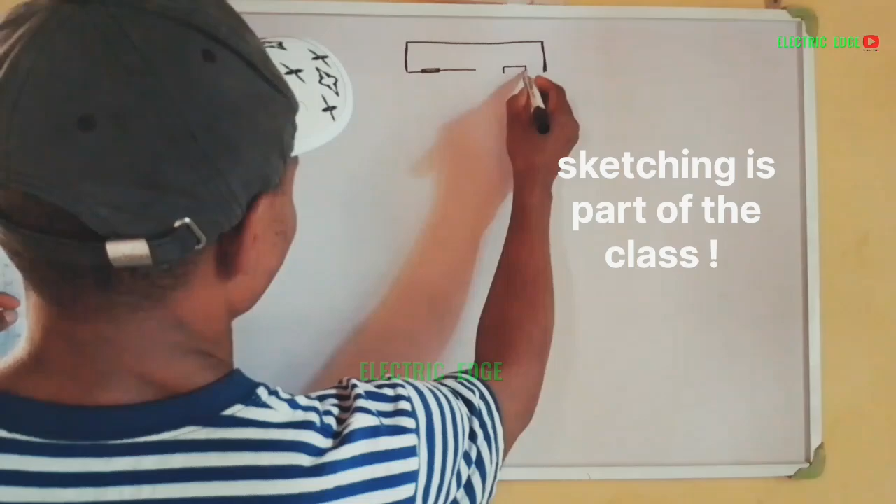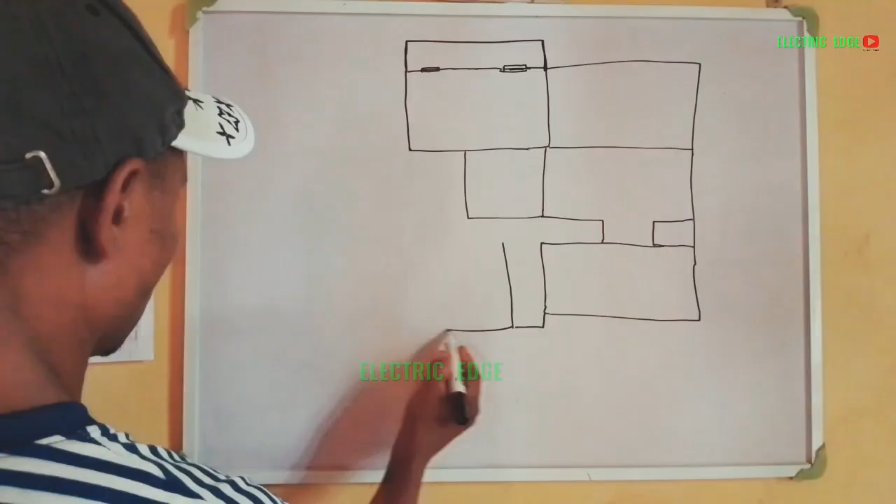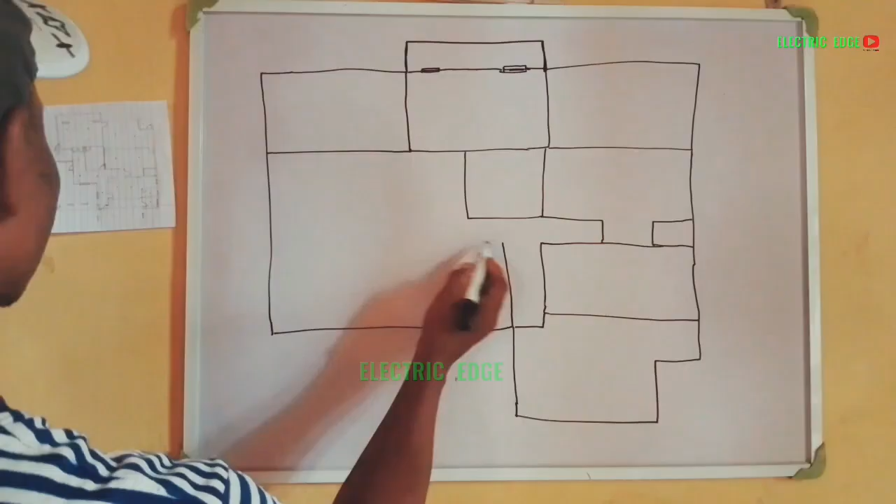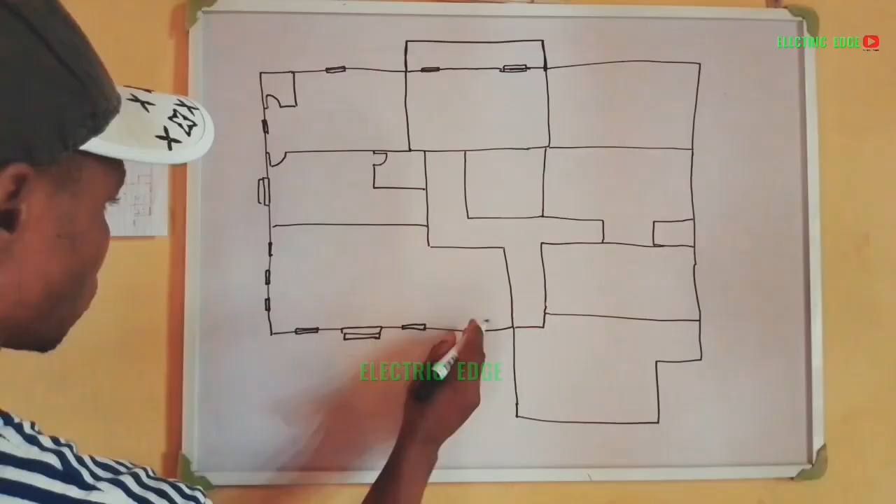This permits me to use this double line as my window. This is a window, this is another window here, this is a window here. Here we have a sitting room, we have a sitting room here. Entrance to this other one is somewhere here. We'll have another window here, we'll have a small window here, another one here, a window here, there's another window.

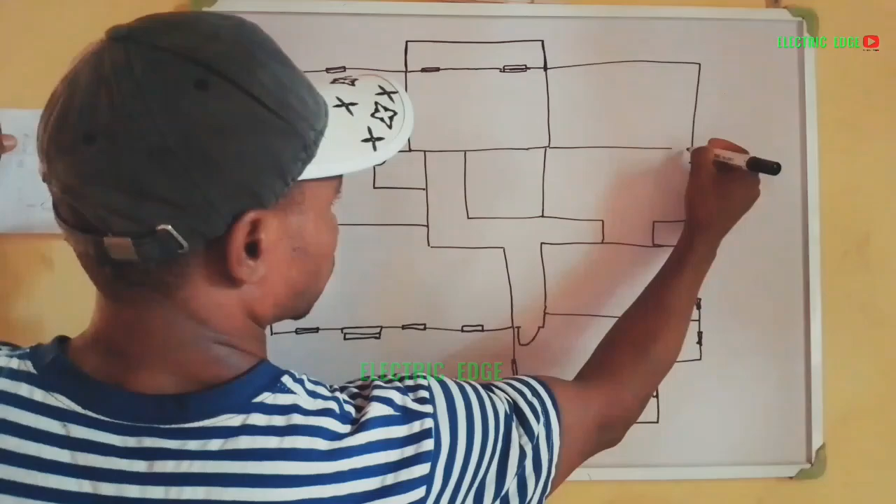Okay, this is a wardrobe. Window here. We have an entrance here. A window here. This is a store. This is a store here. This is a dining, this is where the dining is.

There's an opening here. Here is the sitting room. Here is the kitchen. This is a store. This is another entrance to the kitchen. Then we have another entrance here. This is room here, this is a sitting room. This is room. This entrance, this is entrance, this is entrance.

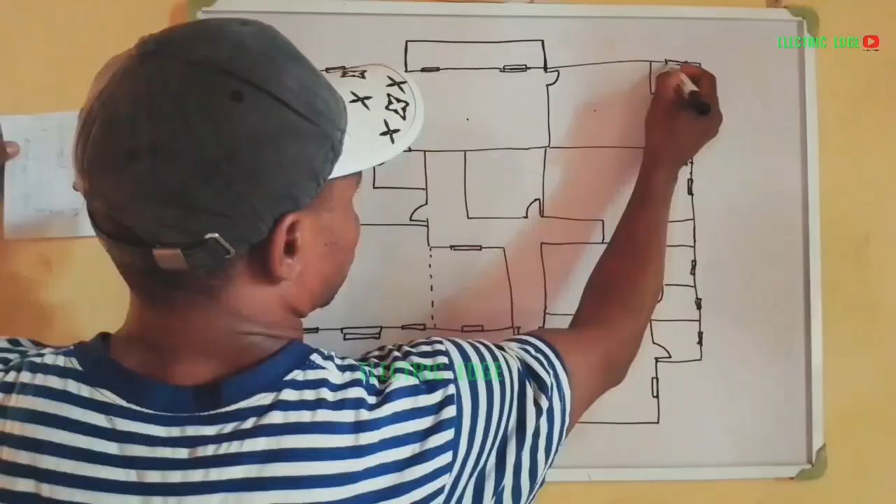Here we'll have a toilet here. This is window. What again? I hope I'm not omitting anything. There's another door here, it's a double door. There's a double door here. Here also is a double door. A double door. A double door.

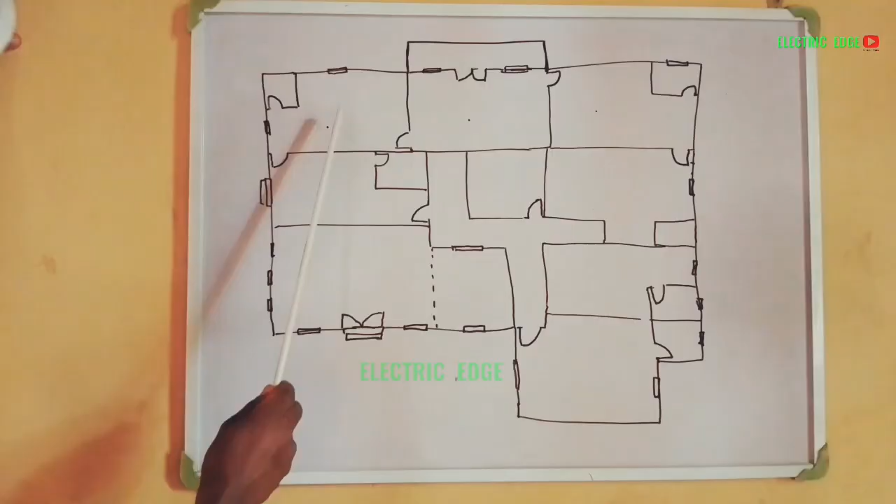So this is an example of what I have here. Now we're going to look at the building. This is a room, we have a room here. This is room 1, this is room 2, this is room 3, room 4, room 5.

This is a sitting room. Here is a sitting room. Here is a sitting room. Here is kitchen, here is kitchen. This is sitting room 1, sitting room 2. Sitting room 1, sitting room 2. Here is a store, here is a kind of store.

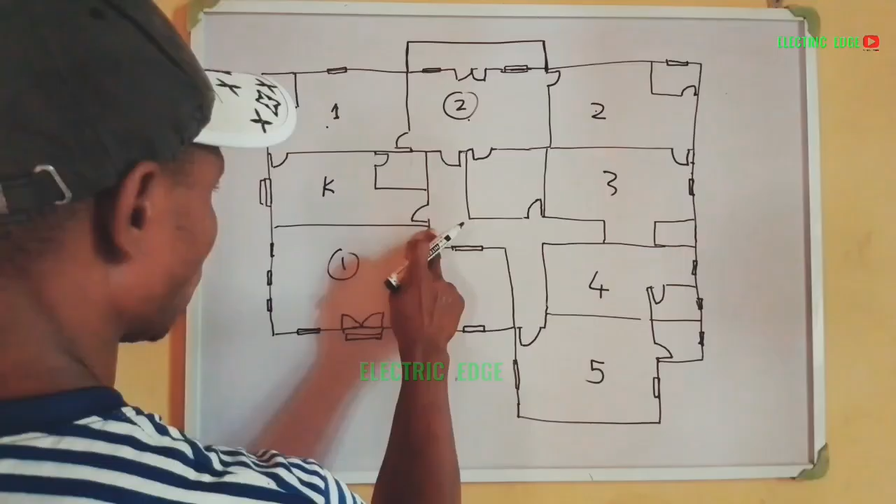Or this is where the solar control room will be. Then here we'll have a door here. Then here we'll have another door. Here.

So I want us to make use of this sketch, we're going to use this sketch in our demonstration. But now I'm going to clean all this. This is room 1, room 2, room 3, room 4, room 5. Here we'll have an entrance to this room. This is the entrance to this room. This is the entrance to that room over there.

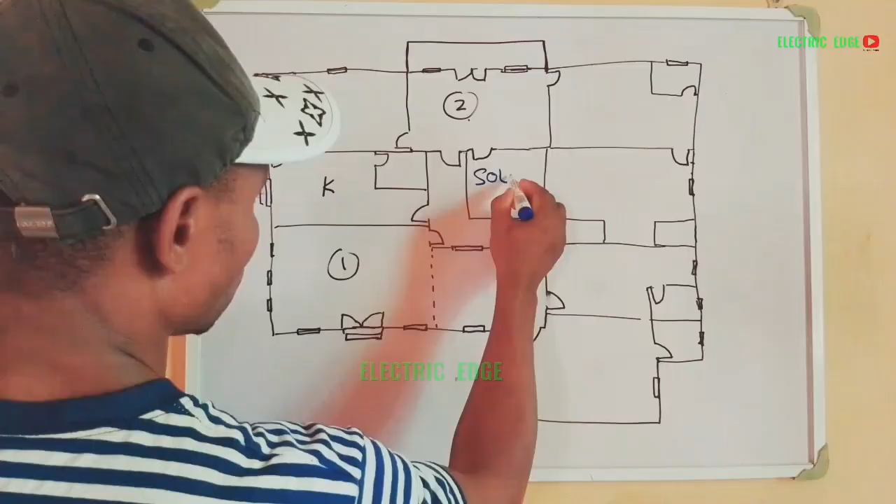Now, what again do we need? Now, we have the kitchen here, this is the kitchen store. This is where we'll keep our solar. This is sitting room, this is another sitting room. This is dining, this is the dining. So now we're going to look at the lighting points.

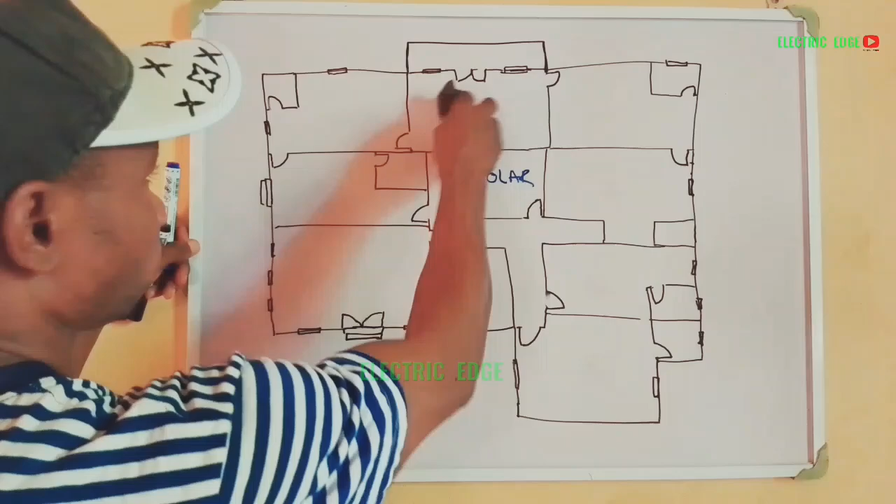Let's start without wasting time. Let's look at the lighting points. Somebody requested that I prepare this and use it to teach our beginners how to prepare their working drawing, their conduit layout.

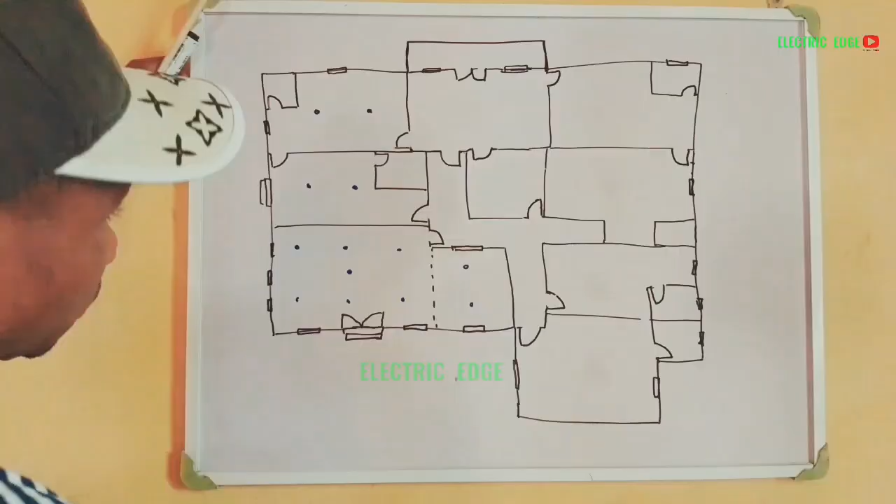Now, this is a room, we have two lighting points for instance. This is the kitchen, we have two lighting points. We have two lighting points. This is the dining, this is the dining, here we have two lighting points. Here we have, let's say, six lighting points: 1, 2, 3, 4, 5, 6. Then we have a middle one, which may be a chandelier, or let's say we have AC.

Here we have AC, and the symbol for this is a 15 amp socket outlet.

This one is for 15 amps, and this one is for 13 amps. So anywhere you see this symbol, you know that AC should be there, because I may not be using the actual symbols.

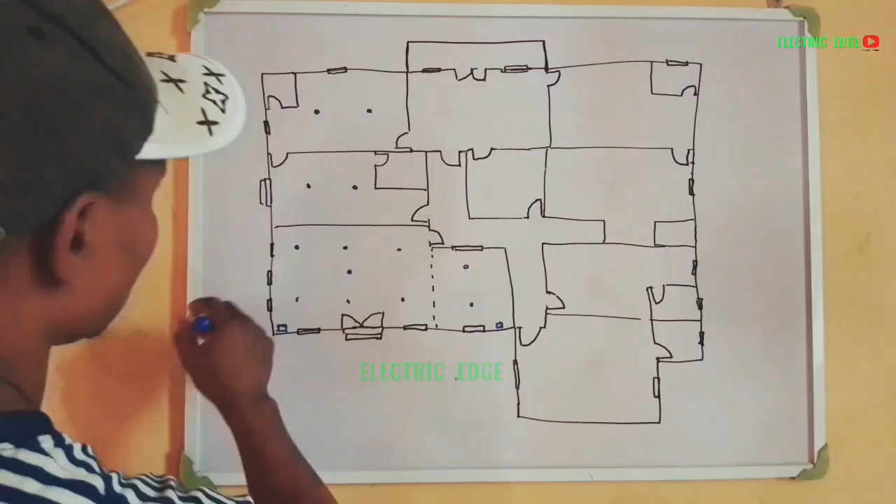Now here we have an AC socket here, we'll have one here, one somewhere here at the dining, then this is the kitchen. Let's say we have one AC somewhere here, and we have a window somewhere here. Let's say our window is here, then here we'll have one AC. Over here, this is room 1, we'll have one AC here, so we'll have one AC here. This is the living room, another living room, we'll have another AC somewhere here.

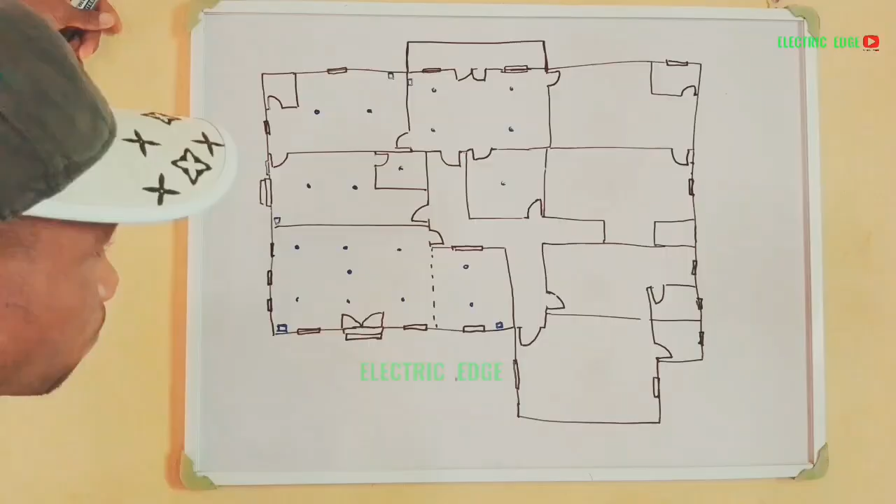Here we'll have 4 lighting points: 1, 2, 3, 4. Here we'll have 1 point of light, here we'll have 1 point of light. In this room we'll have 2 points of light. We'll have one here at the bathroom, toilet, one here. Here we'll have 2, 1, 2. Here we'll have one here, one here, one here. In this particular room we'll have 1, 2. In this room we'll have 1, 2.

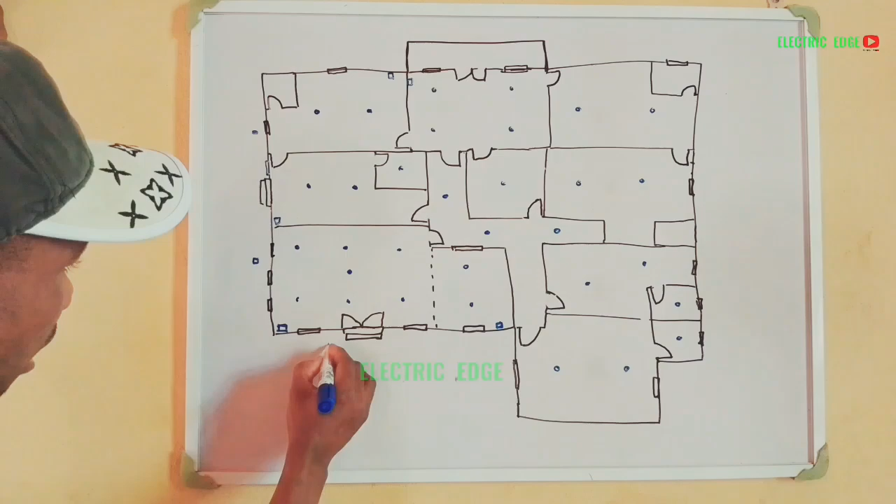Then we should also capture the outside lights, the outdoor lights or security lights. Over here, let's say we'll have 2 here, 1 here, 1 here, or 1 here. This other side, let's say we'll have 1 here, 1 here. Then here we'll have 1 here. This part, let's say we'll have 1 somewhere here. This part, let's say we'll have 1 here and another 1 here. Then this other side, let's say we'll have 1 security light here, 1 security light over there, and in this balcony we'll have 2 here, 1, 2.

Now, one of the methods is for us to count our lighting points, starting from the security lighting. But before we count, I want us to check and cross-check our bathrooms. This bathroom should have 1 point of light here, this other one should have a point of light here. This one is wardrobe, yes wardrobe. This one is wardrobe, and okay, let's count.

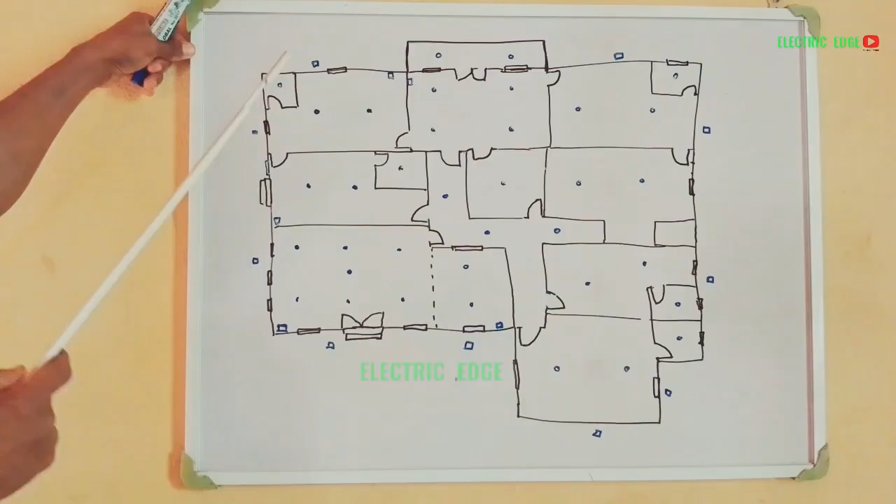Our security lighting points will have 1, 2, 3, 4 here for this side, plus 2 this side. That is 6, 7, 8, 9, 10, 11, and 12. This 12 can give us 1 circuit. 12.

Then let's count the points of light inside. I don't want us to confuse it with the ACs or the fans, because we should be having fans, but let's count the point of light for now. In taking note of the point of light, don't forget that we should have center boxes here, here, and here. For these ones that are 2, we should have center boxes as well, for instance here we'll have a center box already, this one we can have one center box, here we can have one center box. The center box may be used for a fan, that's why we're putting the center boxes, or for center lights. It can be used for spotlights, so that's why we're putting them.

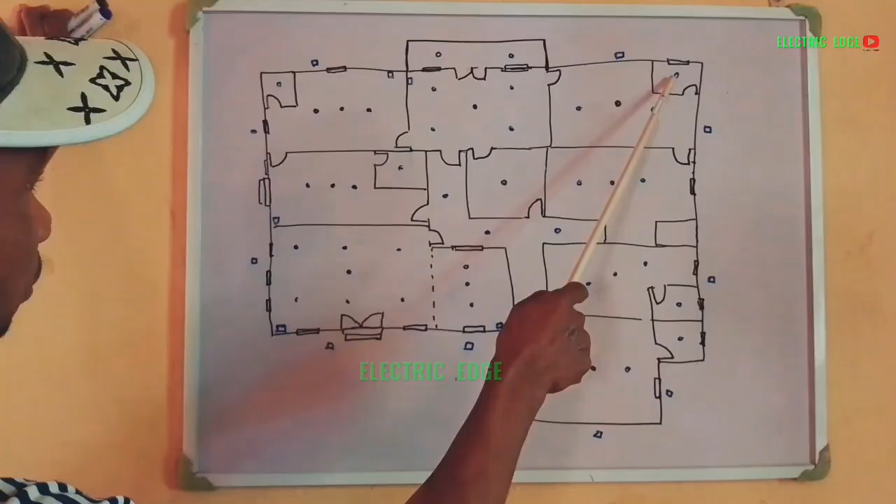Now let's count. We have 1, 2, 3, 4, 5, 6, 7, 8, 9, 10, 11, 12, 13, 14, 15, 16, 17, 18, 19, 20, 21, 22, 23, 24, 25, 26, 27, 28, 29, 30, 31, 32, 33, 34, 35, 36, 37, 38, 39, 40, 41, 42.

We have 42. We have 42 plus 12, that will be 54. The total points of light we have here is 54. Since we have gotten this one, this 12 goes for the outdoor light.

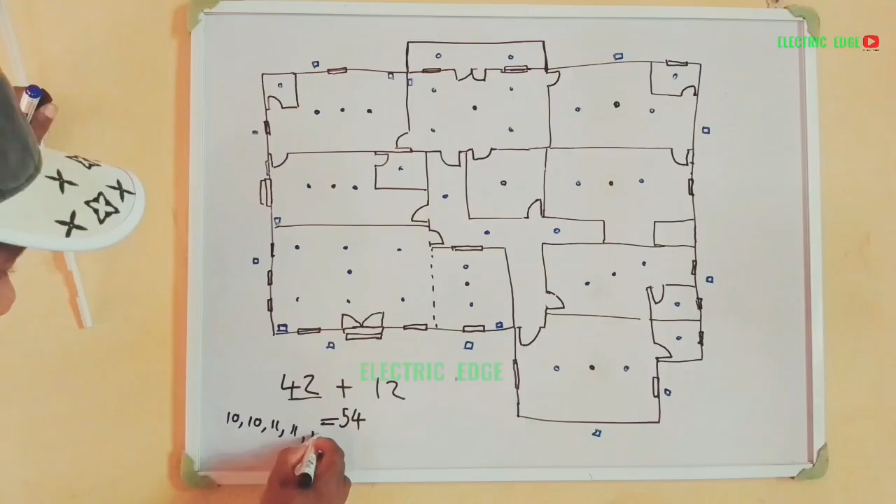We are going to start with the positioning of our switches. For now, we are going to look at the positioning of our switches, and before that, we are going to look at how our doors will be opened. Let's assume we want to enter this house at night, and getting to this point, the moment you open this door, you should open either this one or that one and have access to a switch. When you open this door, there should be a switch here or there, or there may be a switch here and there.

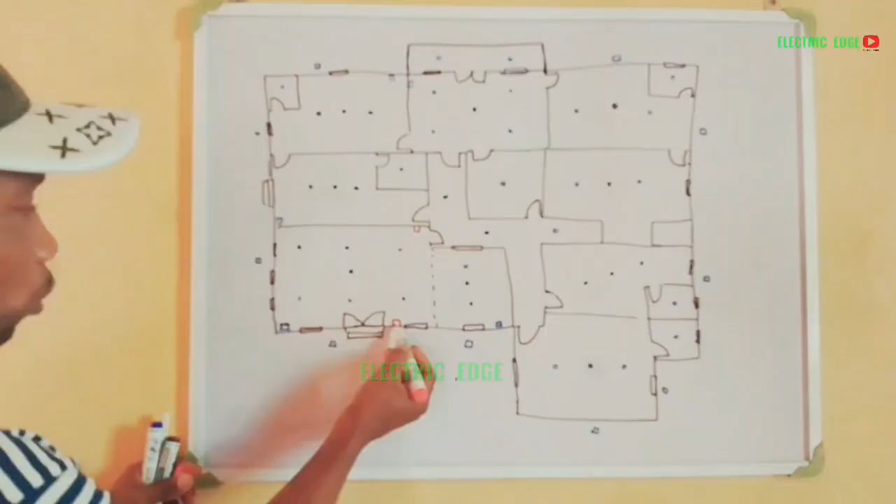So it depends on you. If you want to put a switch here, fine. Then maybe at the close of the day, when you want to go inside and rest, you close this entrance to the sitting room, switch off some of the lights here, switch either one or two over there, close this door, and go inside.

Then for the dining area, there should be a switch as well. The switch can either be here or there. Let's put a switch here, and let's put another switch here.

Let's go to the kitchen doors. When you enter from here, this is the entrance. Let's say there's a door here, maybe a double door or a single door. By the time you open it this way or that way, there should be a switch here or there. Let's put a switch here, and another one here. So if you open the kitchen door, you switch this off, and when you open the door to the kitchen, you turn this on from here.

By the time you want to go in, you should have access to another switch over here. From here you can turn this off. Let me position this very well. Let's say there's a light point here, and another one here, so this is another switch.

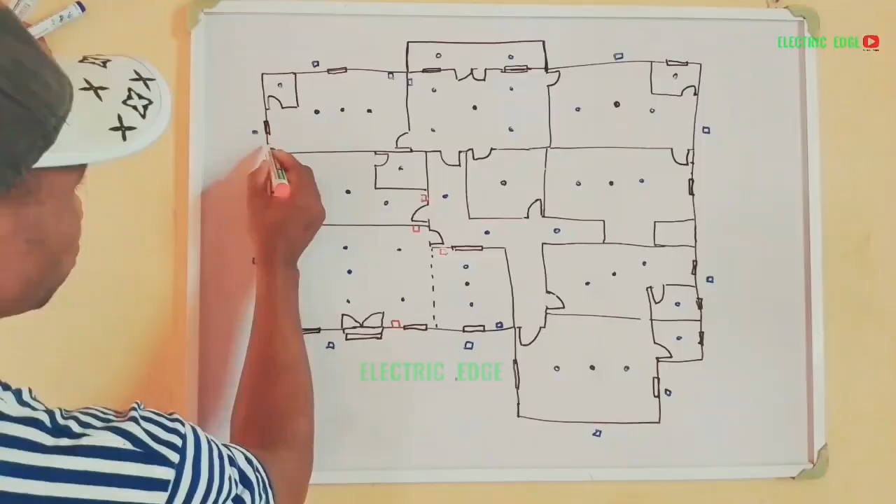Then let's go to this other room. From here you can enter this room, and there should be a switch here. There should be another switch at this point. The moment you enter from this sitting room, you should be able to turn the light on from this angle, then turn it off from this angle.

So let's go to this other one. Here we should have a switch. By the time you open this door and enter the sitting room, or you're coming from this room, there should be a switch somewhere here. Yes, there should be a switch here.

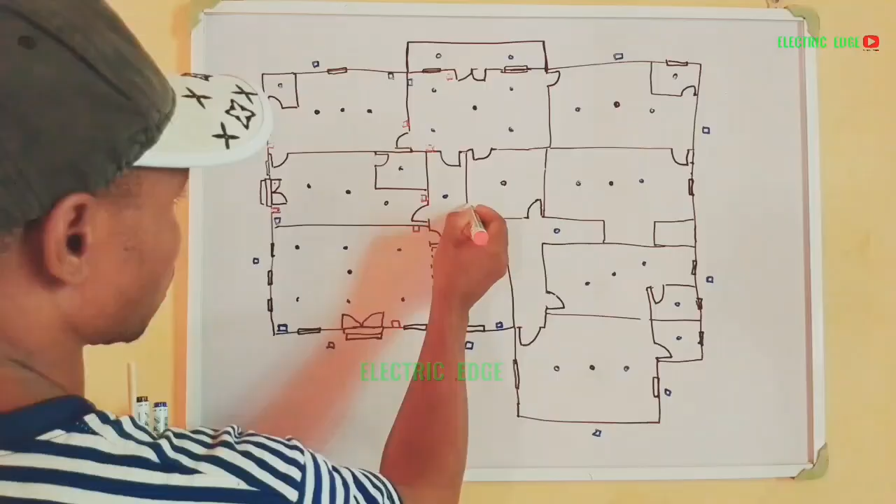Then over here there should be a switch as well, either here or there. Yes, there should be a switch somewhere there. Then over here we should have a switch to control this light, this walkway. And we are omitting a point of light, there should be a point of light here.

This may look complex, but I don't want you to see this as difficult, because you won't always be seeing a simple conduit layout. Sometimes you see something that is a little complex.

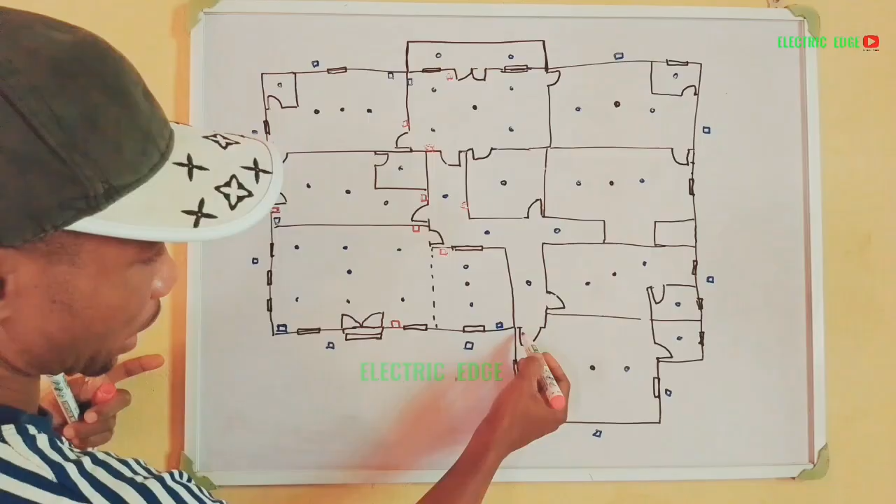Now in this one, you enter this house. When you enter, there should be a switch somewhere there to operate your light. From there we'll also see another switch for the bathroom. Then you go over here.

By the time you open this door, there should be a switch as well, for this particular bathroom. Then let's go on. Assume you come out from this room, there should be a switch here to turn this on, and another switch somewhere here to control this. Let's say we'll have another switch here.

Then you go into this particular room, you should have a switch also. There should be a switch here. You can also have it as a two-way switch, and there's another one here.

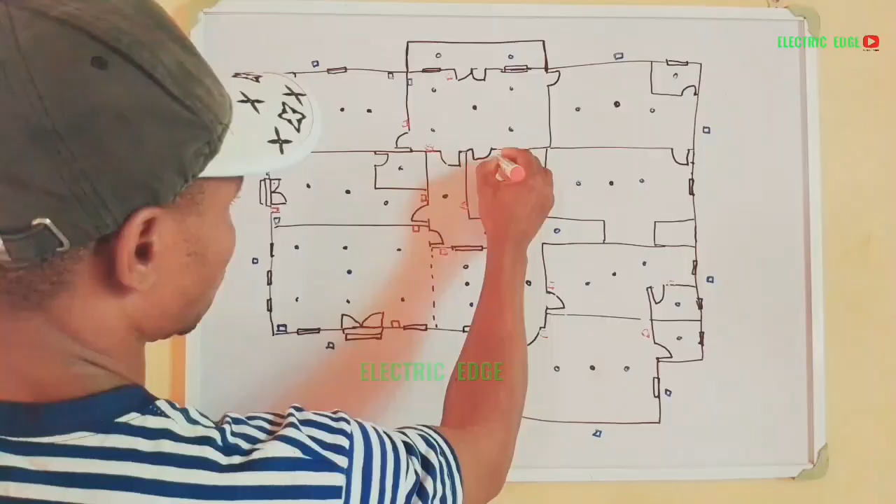Then what again? By the time you go into this, or you come out, just came out, we'll have one switch here, one here. You can have another one here, and another one here. Any of these can also serve for security.

Now we have a switch here for this bathroom. We should have another switch somewhere here, and have another one at the inner side of this room.

The next thing we need to do now is to start routing our conduit. Now if you look at what we have here, we have captured all the points of light.

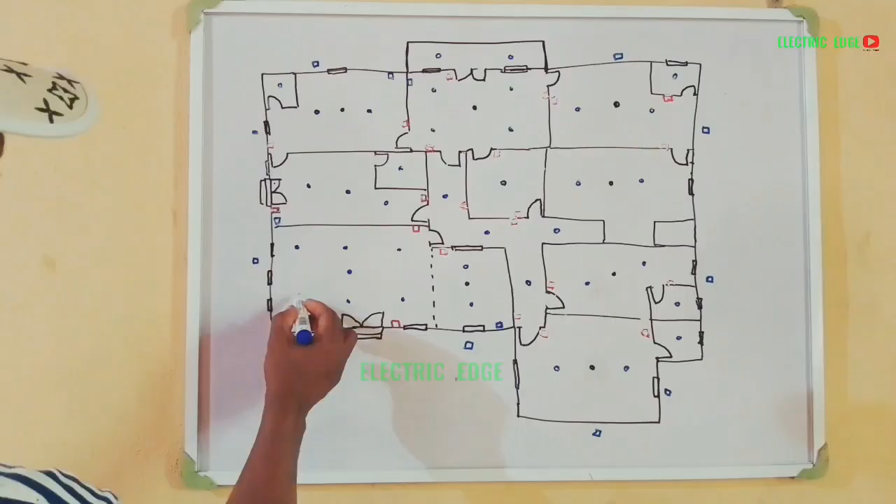After preparing your sketch and capturing all the rooms and spaces in that particular building, the next thing you should do is put in your points of light. After that, choose particular positions for your switches, and that we have captured. Then after capturing the position where you need to place your switches, the next thing is to start routing. In routing the conduit, how do we start?

Now, how we need to start is individually in each of the rooms. Every room should have its own control. You can't control this sitting room from the kitchen, and you can't control the kitchen from here. No, they should have their independent controls. They can share one circuit, but the control should be within that particular space.

Take note of that. Now we want to look at this for the dining and sitting room. Here in the dining room, we're going to interconnect this to this, to this, to this, this, and this. Now, here we want to control this point of light from here.

And remember that we have a fan here, either fan, chandelier, or spotlight. Now we can make use of this particular switch. This switch needs to come to the center. This particular switch needs to come to the center.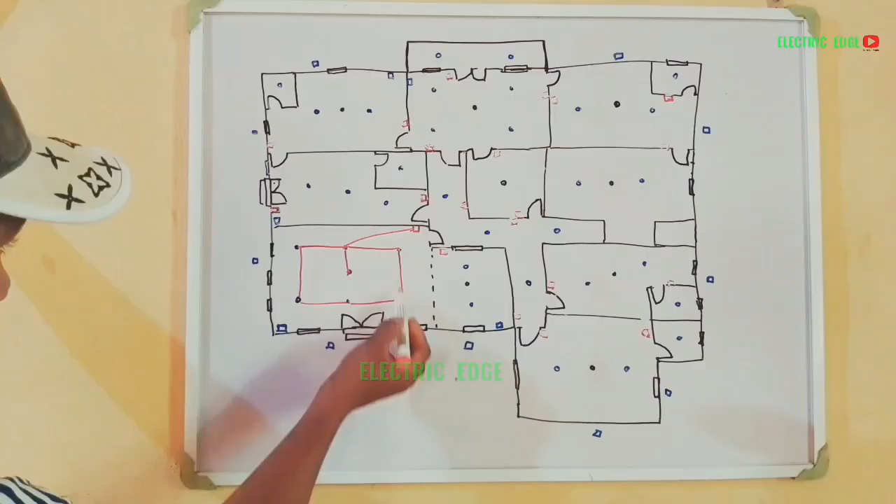Why we are doing it like this is because we may decide that this switch will turn on lights 1, 2, 3 as one gang, or this switch turns on 1, 2 as one gang, then this 1, 2 as one gang. Likewise, this may turn on 1, 2 as one gang, or this 2 as one gang, or this 2 as one gang. Because of that, we're going to cross this to this and then connect it to this other switch. Just take a look.

Before I move on, this is not the only type of conduit routing you can achieve. You might decide to put this particular hand here. This hand can come here, yes, it can come here. It can also come direct to this point. After connecting them together, you might decide that this hand will come here direct.

It is still okay, yes, it is still okay. Or you decide that this hand will come here direct. But let's leave it here for the purpose of this demonstration.

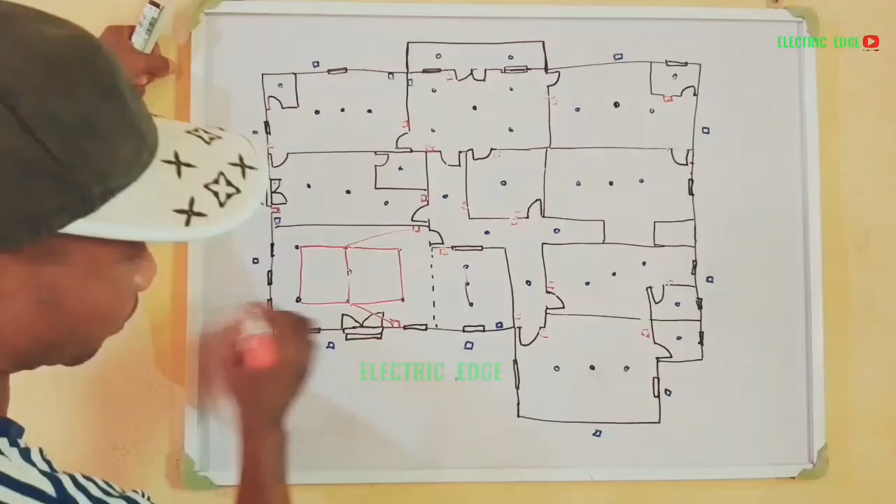Now, in this particular one, we are going to connect this switch here. Our switch will connect this and this. We can bring it to the middle, we can bring this switch to the middle. Then for this switch, I want us to go to the next one. We are through with the sitting room and the dining room.

Now let's go to the next one, this is the kitchen. We can connect this to this and this to this. We can also connect this switch to this and this particular switch to that. For this one, we can connect this to this to this, and connect our switch either to the middle.

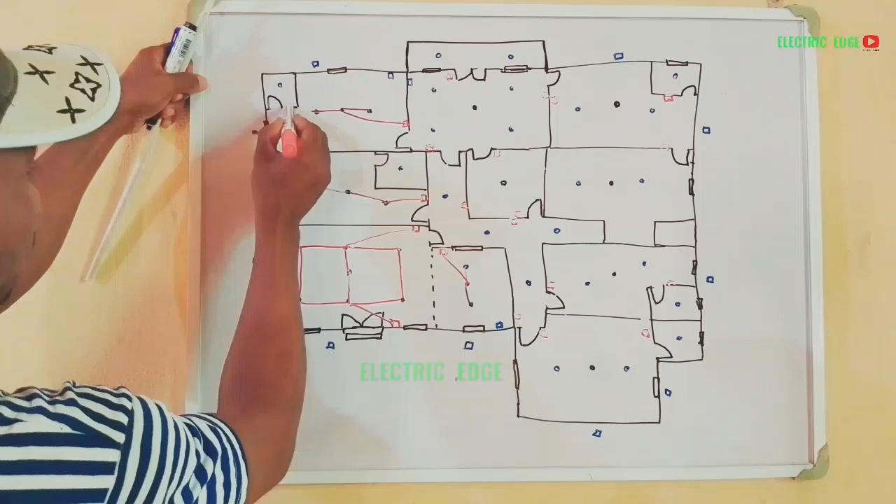Yes, and from here we can also link, this is the switch. We did not put the switch, but the switch should be outside. Now from here, we can connect to this point of light, and from this point of light we can connect to any one of them here. This switch is taking care of this too, in the bathroom.

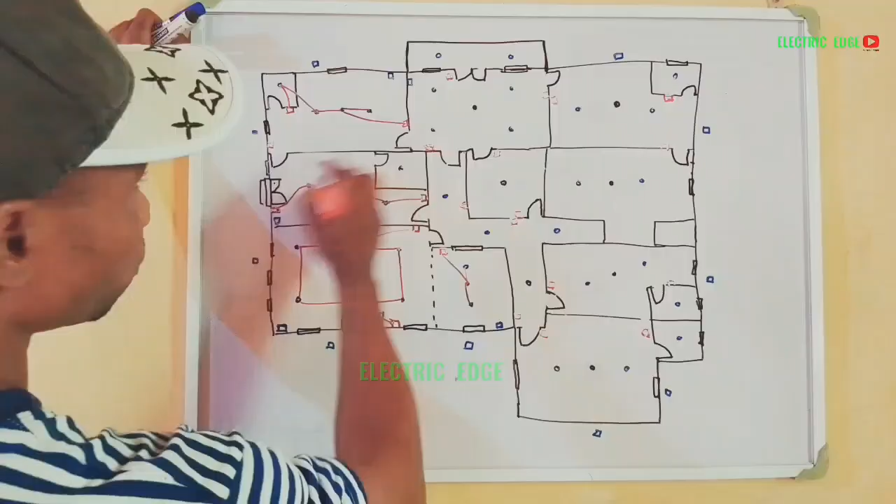So let's look at the next one, this other inner sitting room. Here we're going to connect this to this, this to this, this to this, and this to this. The four of them are connected to each other.

We can also connect this particular one to the center. This is another switch over here. This one can also link to any of this, link to this and link to this. So this is another switch that will take care of some of this light.

So we're going to connect this to this, we're going to connect this. We need to link the four of them, yes, we need to link the four of them. If you like, you can connect this to this, and any one of them can link to the center.

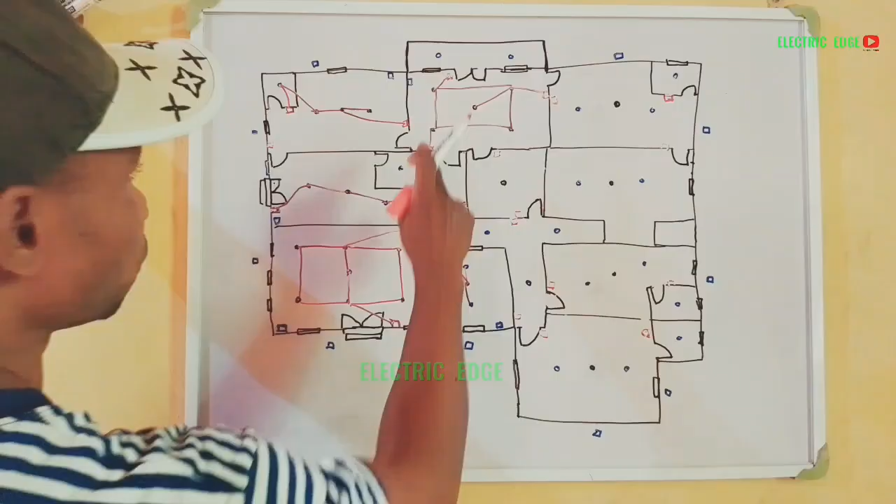This one can link to the center, another one can also link to the center if you like. Or if you don't, you can connect one of these straight to the center. Yes, you can connect any of them to the center depending on how you want it. And if you want to join this to this as it comes to the center, it is also acceptable.

So come to the center, still two. But what I'm looking at, if you want to connect this to the security, to the outer lights. Here, we can connect this particular one to these three, either from here or from there, whichever one. You can connect this switch to this, and from here, we'll connect to this and come out again.

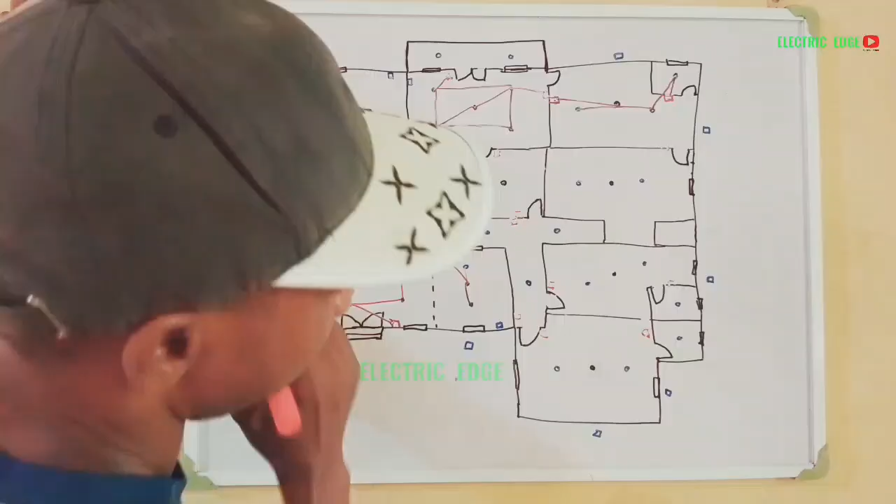Since we have two switches here, this one and another one, you can connect this to this, and then this to this. Our mains can travel from here to there, from here to there, or whichever way. So here we have 2 points, 1 point of light, two switches.

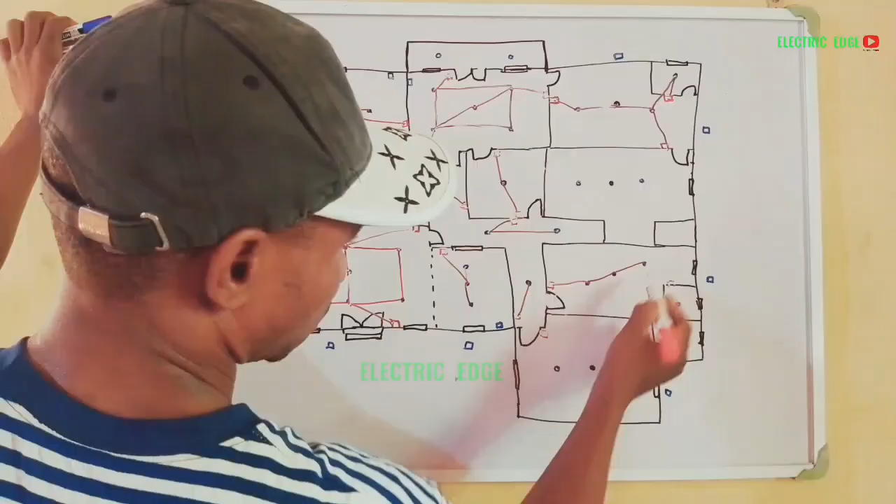This one can connect if this one can come here. This one can connect, this one can link to here, this one can link to this. Here, this one can link to this point of light. This will link to this and this. This will link to this at the bathroom and still come out to connect to any of this one. Then here, this one can link to this and this, and also link to this one at the bathroom.

What again? Here we'll have this particular one, no switch. Sorry, we'll have an entrance here. Got our entrance here. We'll have one entrance, then an exit over there. So for this, we can put a switch here. This switch will connect to this, connect to this, connect to this.

I think we've connected our lighting points. Then it will remain in the security. Then after connecting this, or before we start connecting this point of light, you can choose the position for your distribution board. And the positioning of your distribution board should be an accessible point where there is ventilation. Here we put our distribution board here.

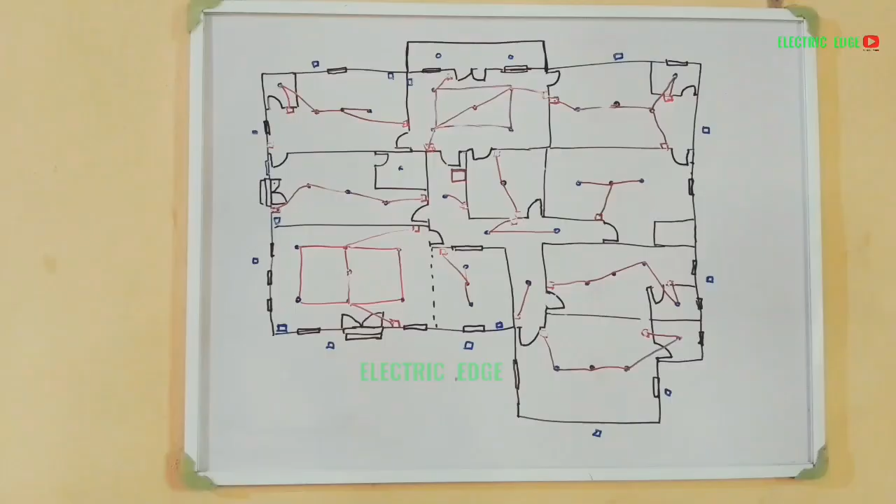But one distribution board may not be able to carry all the loads in this building, because by the time you check the point of light, check the ACs, check everything that we may have in this building, you discover that one distribution board may not be enough. So in this type of installation, there's every possibility that we'll be making use of two distribution boards.

Now, if you are preparing this, at this point, you need to choose a particular location where your distribution boards will be installed. But that does not mean that you've chosen a distribution board. We've not chosen any distribution board at all, because it's the number of circuits that we'll be having in this particular building that will show us the number of distribution boards we'll be needing.

Now, we've gotten the circuit. We decided that we're going to make use of 5 lighting circuits. Now, by the time we check the AC, let's assume we have one cooker unit. For instance, at the kitchen here, we'll have one cooker unit, we'll have one AC here, we'll have one AC in each of the rooms. That will be 5 ACs.

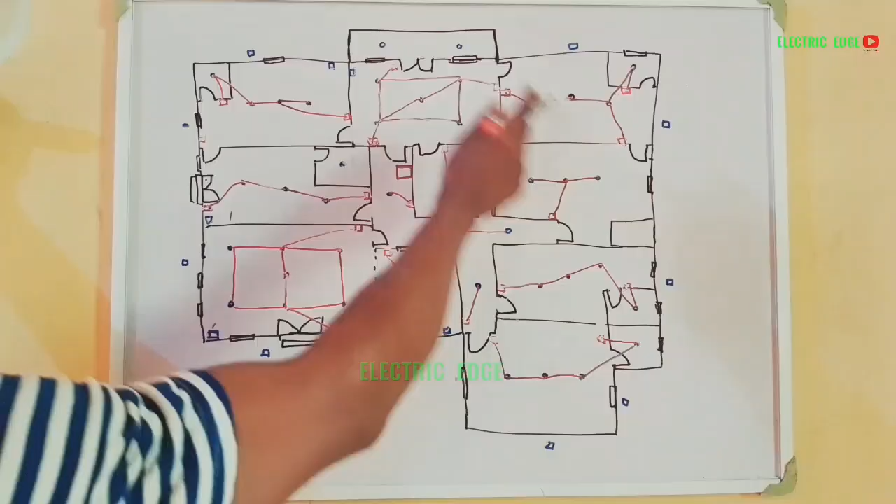Then here at the dining, we'll have one. Living room, we'll have one. This other one, that is 5. Plus the one at the kitchen, that will be 6. By the time you add the one for the living room, these 2 living rooms and kitchen, 3 plus 5 is 8. Plus this particular one, that will be 9. Then we'll have 9 circuits as well.

Then we've not added that of the cooker unit. We'll have 1 cooker unit. Then we check, let's say we have water heater in each of the bathrooms. We have 2 here, 2, 3, 4. We'll have 4 bathrooms. Then how many circuits? We'll have 4 circuits here.

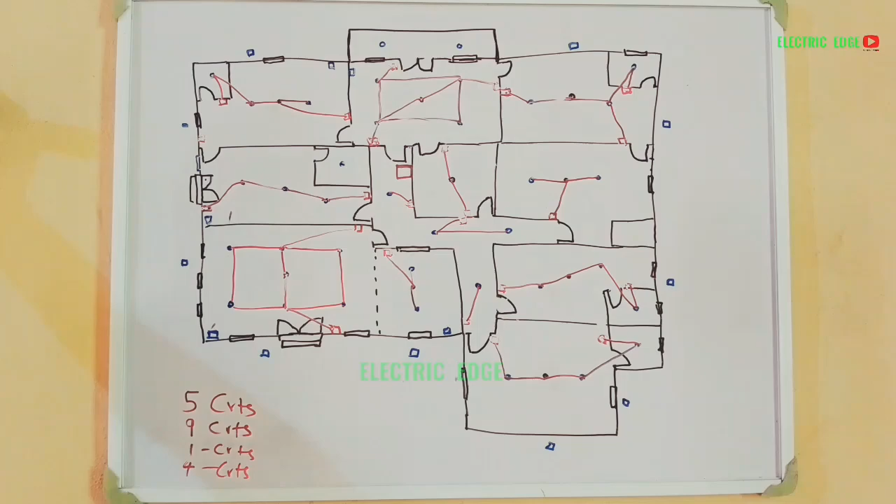That will be 9 plus 5 will give us 14, plus 1 is 15, plus this 4, that will be 19. 19 circuits. Don't forget that we've not added the one for our socket outlet. Our socket outlets, we may be having something like 5 circuits. By the time you add it, I'm just assuming, by the time you add 5 to 19, we'll be having 24.

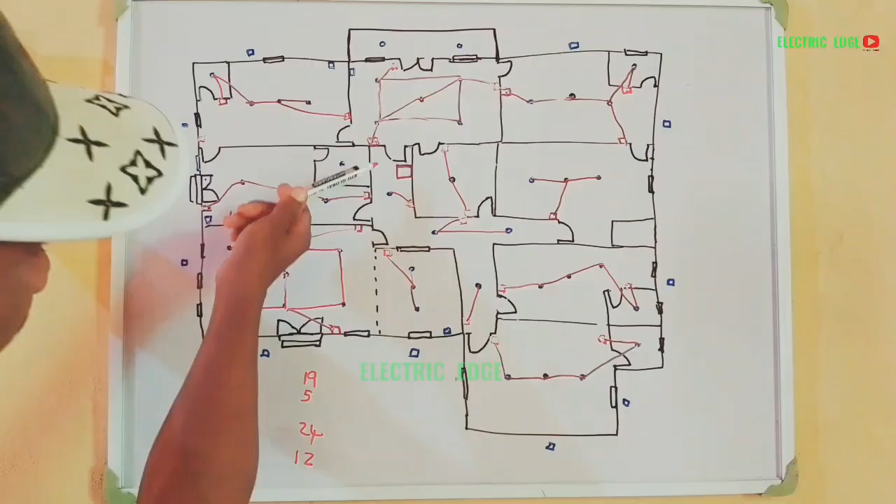24. And remember that the DB will be selecting, we're not going to use all the ways. If we have 24 here, by the time we split it into 2, we should be having something like 12. Then we should be looking at using 2 distribution boards. By the time we use 2 distribution boards, this one maybe 16 ways, this one maybe 18 ways or thereabouts. We can make use of 3-phase 4 ways, or let's say 3-phase 6 ways.

6 ways, that will be 18. 3 times this, that should be giving us 18 openings. 18 openings, that's 18. Then if we should look at another DB, because we are going to look at spares,

we'll have another 3-phase 4 ways. 4 ways, that would be 12 openings. Yes, that's 12 circuits.

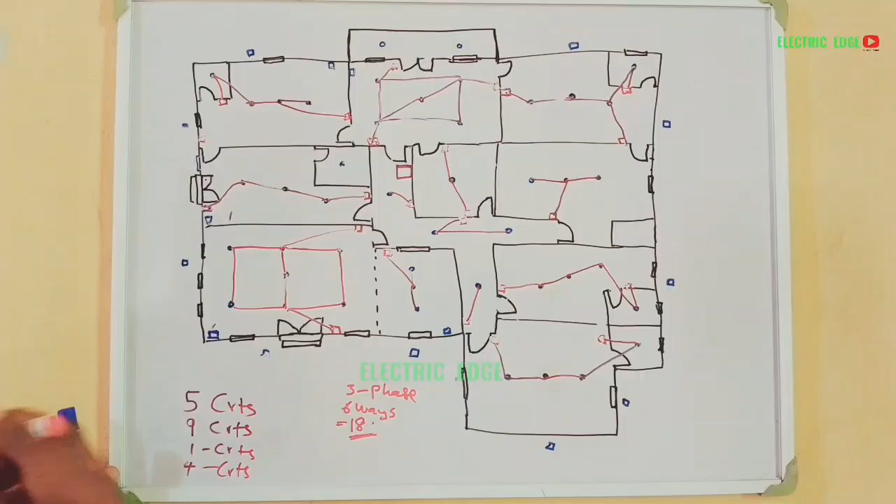So if we use a 6-way 3-phase 6-way, that will be 18. So we can make use of this particular type of distribution board so that we accommodate all our lighting points, have reserve, have our socket outlet, dedicated sockets, and everything that we need to capture in this building. And for future expansion, we might decide that the spares need to be there as well.

So we are still going to go on with the piping layout. Now in this piping layout, let's look at how the circuits will be. Then for the lighting circuit, for the outdoor lighting circuit, we've not done anything yet, but I want us to look at that before we proceed.

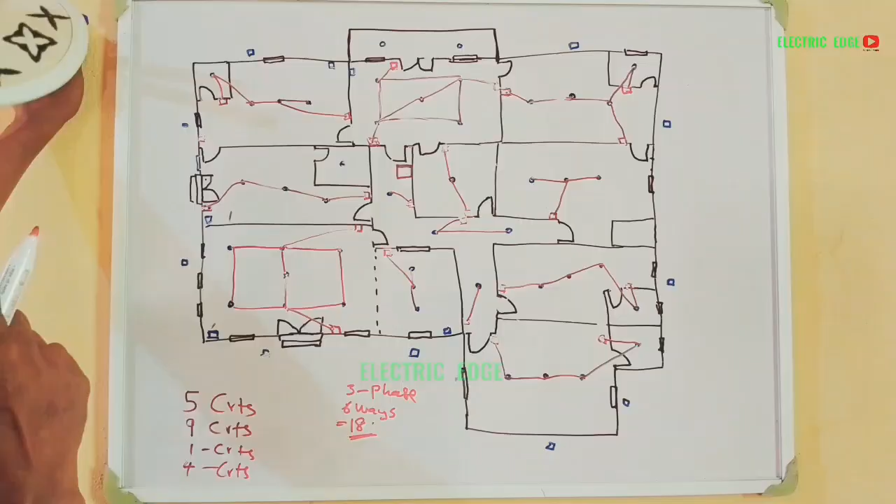For the lighting circuits, we should have how many? We counted it, it was I think 12 points of light. So the 12 points of light, how do we split it, or do we split it into 2? If we split the outdoor light, the security lighting point, into 2 circuits, it will be giving us 6 circuits for the lighting circuit. For the lighting point, we'll be having 6 circuits.

Okay, let's assume we have 2 distribution boards here. Don't forget that we have our switch here. Yes, we have our switch there already. Now, one distribution board can take care of this part. The other distribution board can take care of this other part. I hope we are following. I want us to look at it.

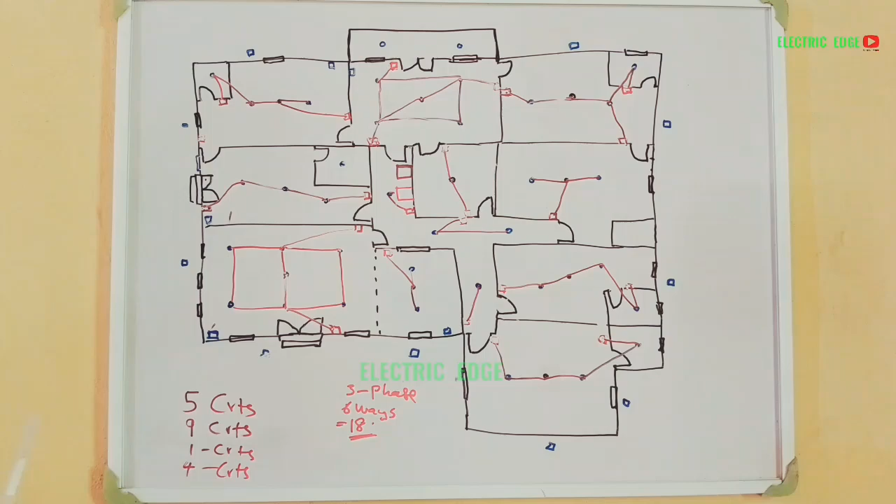We decided to choose 1 distribution board or 2 distribution boards because 1 distribution board will not be able to give us what we want. We have around 24 circuits in total, about 24 circuits, and we don't even have space. So because of that, we want to make use of this particular distribution board, a 3-phase 6-way distribution board.

Now this distribution board, we are not going to use 1 distribution board, we are going to make use of 2 distribution boards. Now these 2 distribution boards, we are looking at it that we are going to start from here. This sitting room, this room, this kitchen, the living room and the dining will be having 1 DB, while this 1, 2, 3, 4 rooms, with this particular room, this small room for our solar, we'll be making use of this other distribution board.

Now, another thing I want us to look at is the security lighting. The security or the outdoor lighting, we're going to split that into two. And by the time we split it into two, we'll be having more than 24 circuits. Yes. Now we're going to start with one particular distribution board.

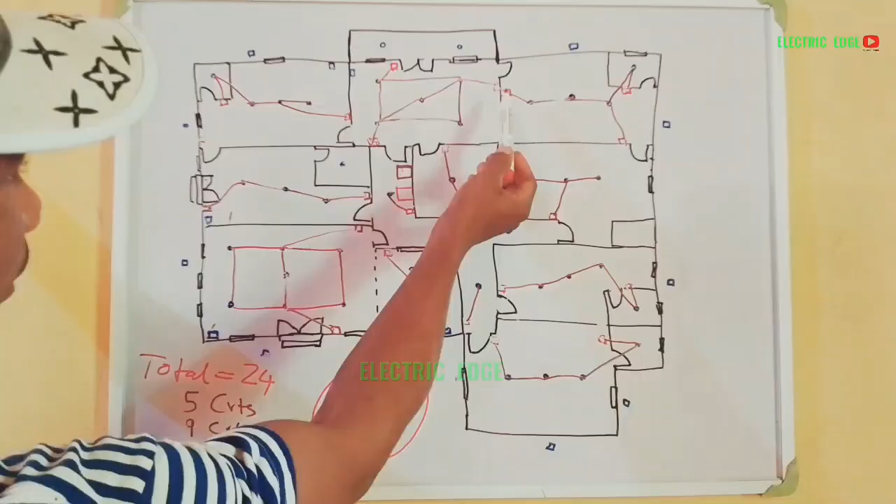If we start with this particular distribution board 1, now let's look at the lighting point for this particular area. We have 1, 2, 3, 4, 5 here. 5, 6, 7, 8, 9. We said we're going to make use of 10. Now this one is 9.

We can add this other one to make it 10. Yes, we can make it 9. Now let's say from here we're going to link this particular room to the living room. Yes, we're going to link it to the living room. How do we link it?

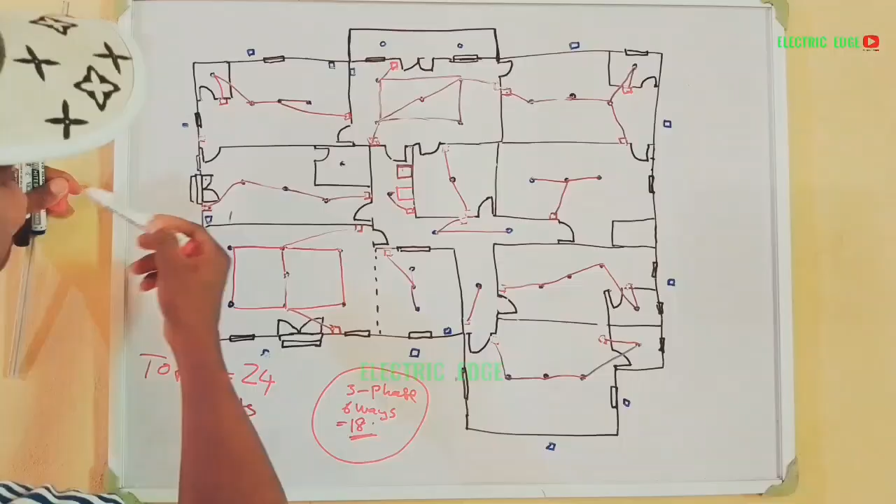We can link it from here, one of this switch, from here, from this point that is closest to this switch, we can link to this other point, or from here we can link to that point. We can link from here to this point, so that sharing of the mains will not be difficult for us to get from one switch to another switch.

Now from here we can also link to another one. From here, this is 1, 2, 3, 4. This one is complete. If we don't want it that way, we can pass this way. We can travel from here to this one, then come back here. Yes, this is 4 now.

We can also travel from here to this particular point. And from this point, we get to the DB. That is one circuit. Now for this other one, we look at the other circuits. We have one point of light here.

Our switch is somewhere here. Now from here we'll connect to this one. From this we have 1, 2, 3, 4 points of light. From this 4 points of light, we have 4 here. Then we have 1, 2, 3, 4, 5, 6, 7. 7 plus 4 is 11.

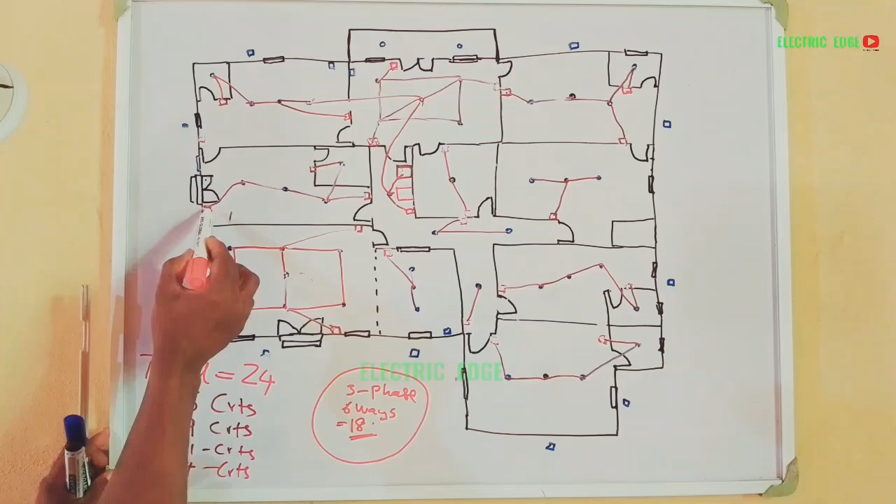Now we are going to link our mains from this switch to this switch. I hope we're not traveling far. Let's travel from here to this point. We can travel to the middle so that we can easily get to all the switches. Our mains traveling from here to this point will not be difficult.

I think we are there. Then we have gotten how many? We have gotten one circuit here. This circuit we have 10 points of light. This circuit we have 11 points of light.

Let's see what we are getting here for this particular one. We have gotten 2 circuits for this particular one. Then for this other one, we're going to start from here to this part. Let's say we have 1, 2, 3, 4, 5, 6, 7, 8, 9, 10 lighting points. This 10 will take care of one circuit.

So here, from here, we'll link to this from here. Either from here, can link to this. From here, we can link to this. And from here, this is already 4. From here, we can link to this.

Yes, and don't forget, these ones are not joined. From here, this is 3. This is 2. We can link to this. I think we have taken care of that particular circuit.

And this circuit, from which point are we traveling to the DB? What we need to do, we can remove this switch from here. The switch can come to this point, get to this point. From this point, we have gotten one circuit for our second distribution board, and this particular circuit has not traveled to the DB.

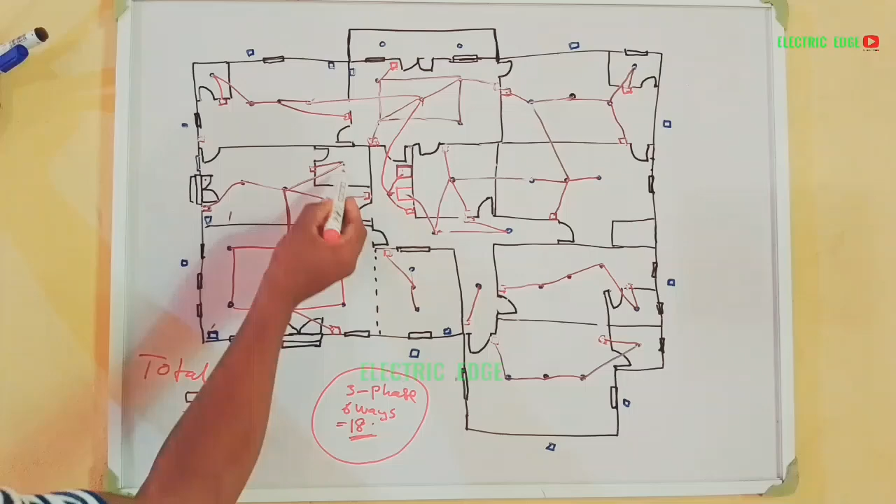So sending this to the DB is easy. We can travel from here to this part or to this DB. From here we'll get to this, from here we'll get to all these ones and down to this other one.

Now we are looking at this other one. Here we have 1, 2, 3, 4, 5, 6, 7, 8, 9, 10, 11, 12. Over here we'll have 4 points of light. We're supposed to have 12. Over here we have 12, you see, because I added the center boxes.

1, 2, 3. Okay, here is supposed to be 2. 1, 2, 3, 4, 5, 6, 7, 8, 9, 10, 11. From here, we're going to join to this. We're going to join to that one.

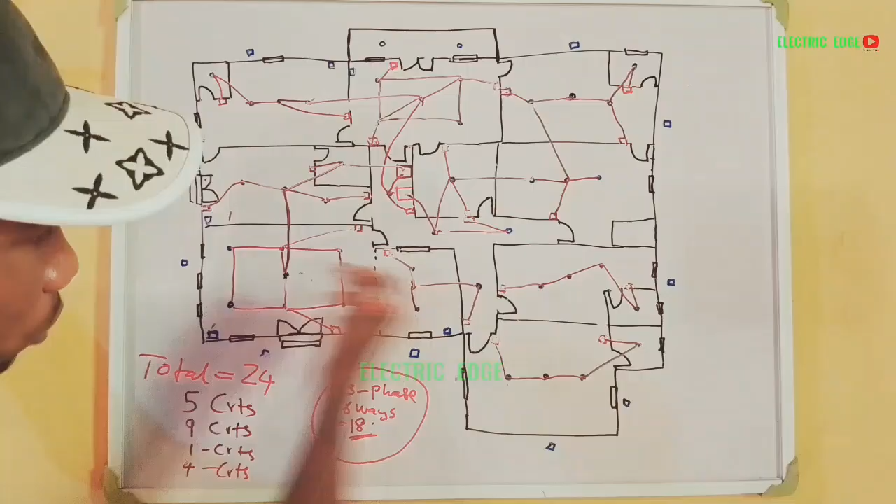Yes, or if you like, this switch can connect to this. You can come here and there. Then from here, this one should connect to this other part. So from here, we can link this to this. We can link this to this. We can also link any of these two.

We can link this to this, and this to this other room. Then from here, we can link to this DB. Just take a look at what we have done so far. So here we have gotten all the circuits inside the house, the lighting circuits for the lighting points inside the house.

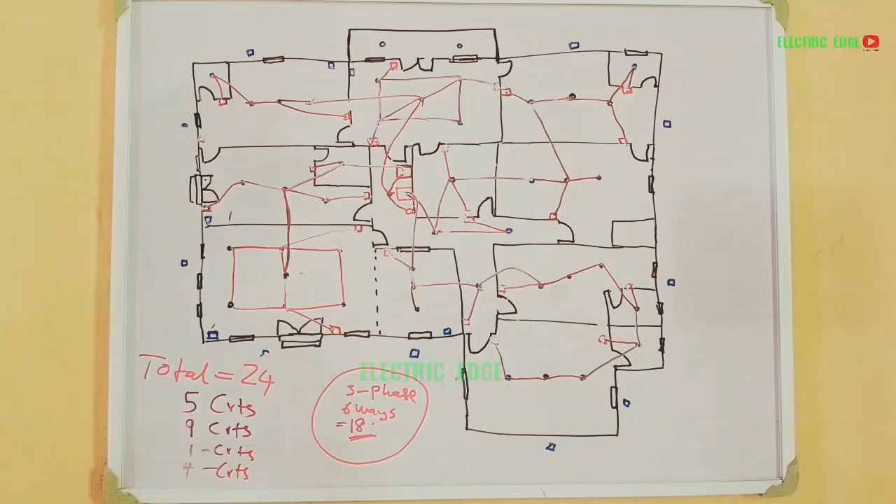Now we're going to split this other one into two. We have 12 lighting points for the outdoor lights, but we're going to split them into two. One of them will be controlled from this particular sitting room, while the other one will be controlled here from the back. So over here, what we need to do now is split them into two.

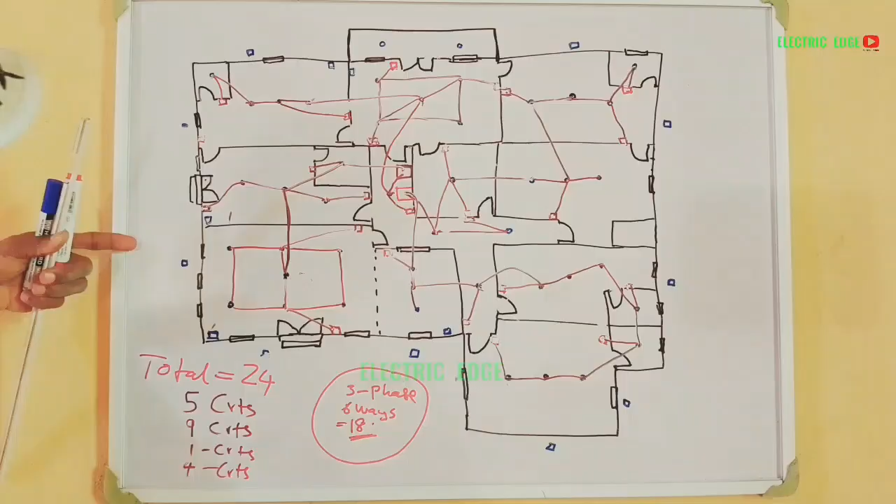Are we going to split them like this or that other way? Whichever way, since we have two here, we'll choose this one. Since we have two here, we'll pick this one. 1, 2, 3, 4, 5, 6. This 6 can be controlled here in this front living room, while this other 6 can be controlled here. I think that will be okay.

So here we're going to connect this to this. Let me not confuse you.

So we're going to connect this to this, this to this, this to this, this to this, and this to this. 1, 2, 3, 4, 5, 6. So this 6 will be controlled here.

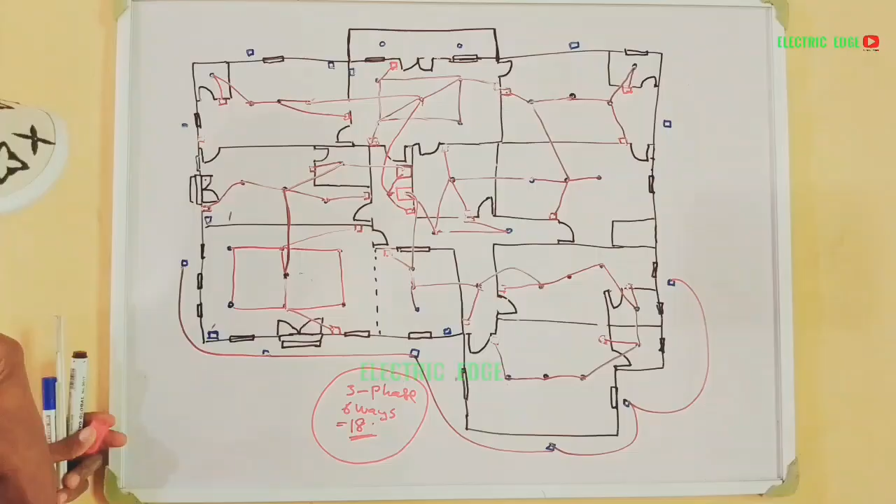I think we can pick a particular point where the switch will be located. The switch can be located somewhere here, somewhere here, or somewhere inside this particular dining area. With the dining, we can connect this.

Our pipe can come from here to this point, and it will come back to this switch.

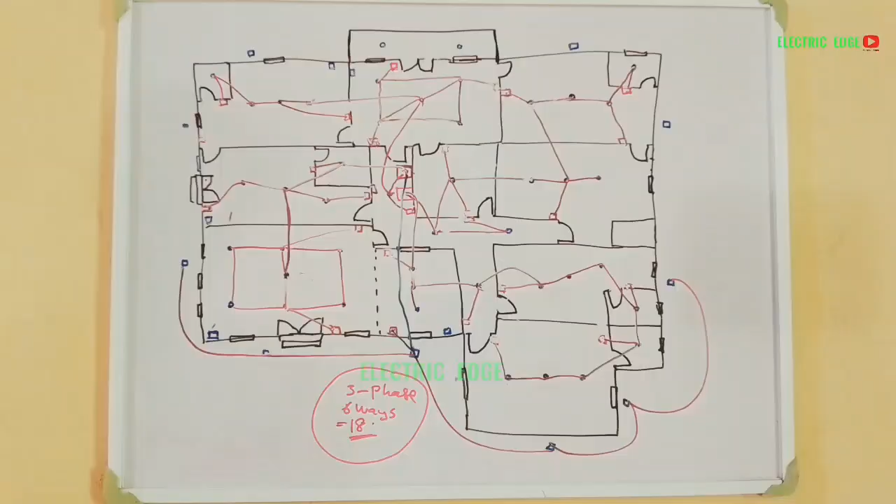Whichever way, if you travel from the DB to the switch first, it means your neutral will travel from the switch. But if you take this to the DB, let me use another color. If you take this to the distribution board and back to the switch, that means your neutral will not get to the switch. It will not get to the switch. And remember, what we are doing is a parallel connection, so it will come back to this.

Now this other one, you can put the switch somewhere here, or it can be somewhere there. So all we need to do is connect this, 1...

2, 3, 4, 5. Or should be 6. 1, 2, 3, 4, 5, and 6. Yes. 1, 2, 3, 4, 5, and 6.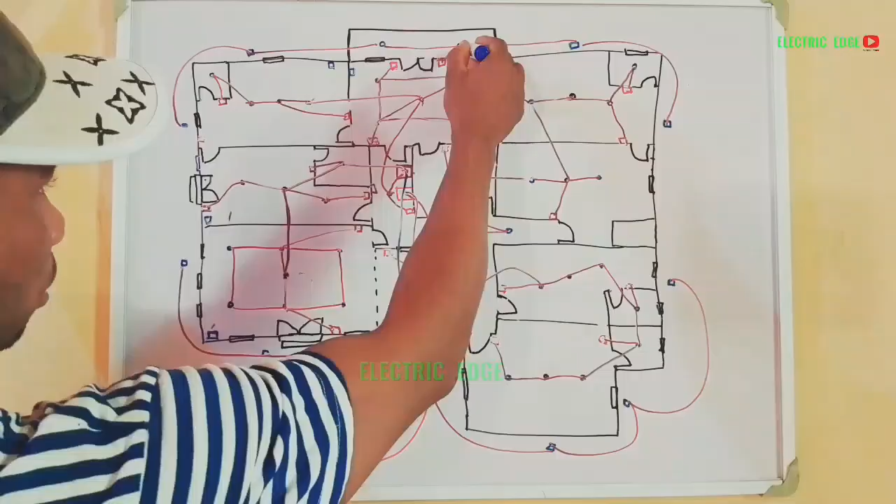So our switch can be here. Our switch can be here. And if our switch is here, it can also travel from here to this distribution board.

Now, if you take a look at what we have done so far, for this particular distribution board, we have gotten 3 circuits. The first one is 10 points of light. The second one is 11 points of light. 11, yes, 11, and the other one is 6.

Are we in order? Let me count it. The one for this security is 6. This one is DB1, the first DB. This one is DB2. So we have 6 here, we have 6 here.

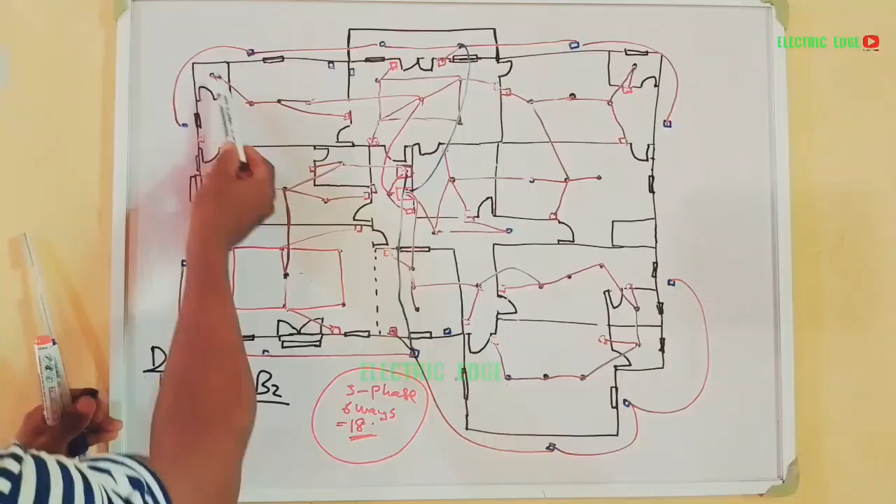Here we have, let me count them. 1, 2, 3, 4, 5, 6, 7, 8, 9, 10. We have 10 here. The first one is 10. The second one is 1, 2, 3, 4, 5, 6, 7, 8, 9, 10, 11. The second one is 11.

Then the third one is the security lighting point. Then this other one will have 1, 2, 3, 4, 5, 6, 7, 8, 9, and 10. This one has 10. Let me start with 10.

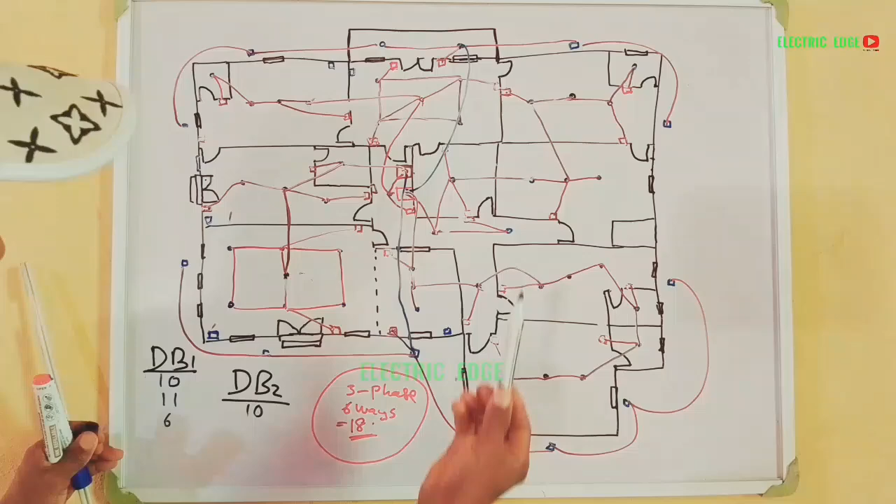Then this other one has how many? 1, 2, 3, 4, 5, 6, 7, 8, 9, 10, 11, 12. Because of this one, let's say we have 12 here, 11 or 12. Then for the security we have 6.

I think we have balanced the circuit, and if we should move ahead to check that of the power point, let's check the power point. Or will it be so confusing? Will it be confusing?

Now we have gotten this. We have gotten 3 circuits for DB1 and 3 circuits for DB2. Don't forget that this part is for DB2, this part is for DB1, and here is our DB1, here is our DB2. Now we're going to look at other things that we need to add in the distribution board, which include our socket outlets, our dedicated circuits, and every other gadget that we need to add in the calculation.

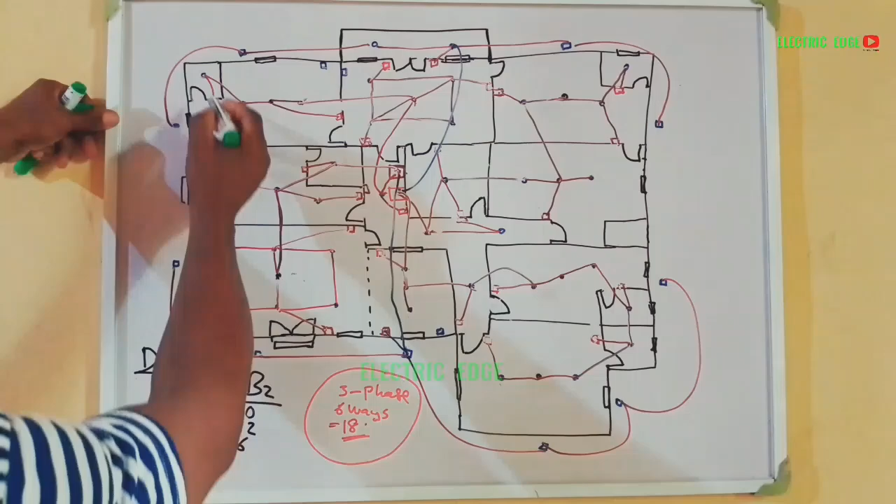So here we are going to add our water heater. One water heater here for this part, one water heater here, one.

Then what again? Our AC. We have one AC here, one AC here, one AC at this particular room. In this particular room, we have one AC. Let's count it very well.

Now we're going to have one AC in this particular living room. That is one here, that is 2. At the kitchen we have 1, 3, here 1, 4, here 1, 5, plus the cooker unit.

Now let's say this one is for the cooker unit. Then we have 1, 2, 3, 4, 5 ACs. We have 5. We have gotten extra 6 circuits. I may not finish everything, but I want to give you an idea so that while you are preparing yours, you know what you should be looking at.

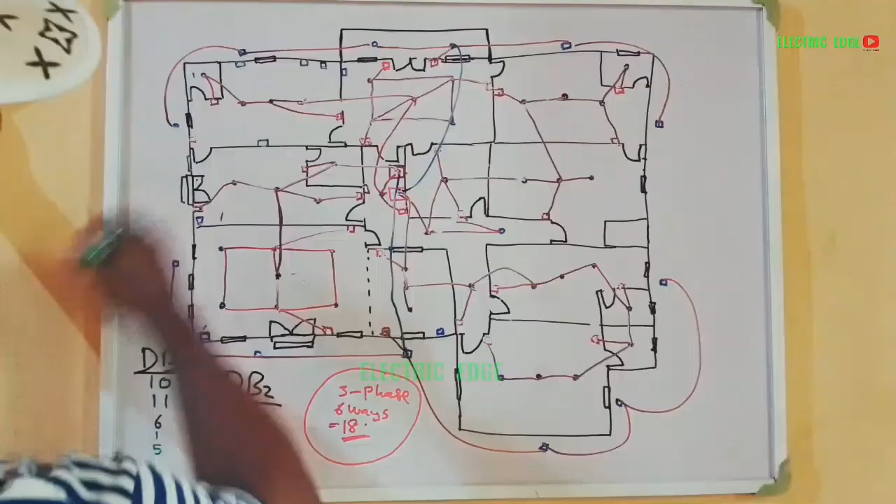Now in this other one, we did not include the 13 amp socket outlet. Let's assume that here in this room we have 3. We have 1, here's another one, 2, and another one, 3. Then for the kitchen, let's say we have 2 13 amp socket outlets.

These 3 here plus 2, that's 5. Now here in the living room, let's say we have 4. 4 plus 5 will give us how many? I think 9. Where are we placing the 4th one? And the 5th one, let's say we have another one here. That should be 9 in number.

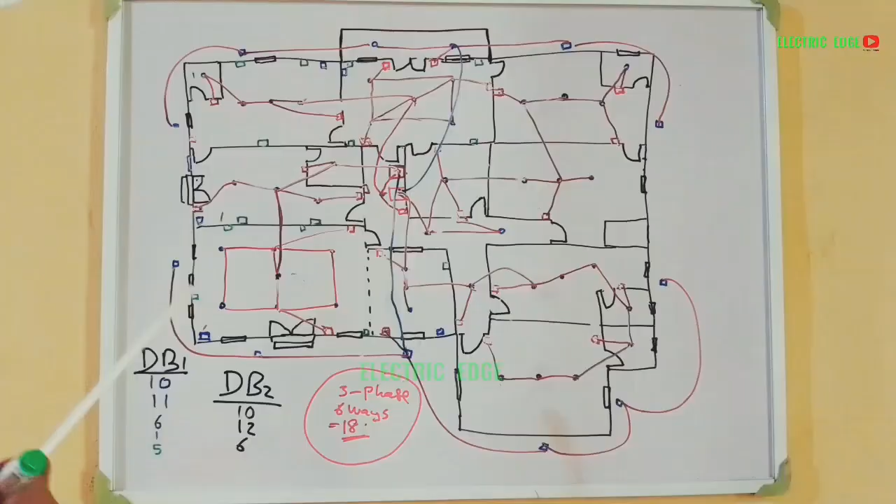9 in number, plus this other living room. Here in this living room let's say we have 4 - 1, 2, 3, and 4. So 9 plus 4 should be 13 in number. Let's count: 1 through 13... 14. Am I correct? 1 through 14. Okay, we have 14 here.

If we split this 14 into 3, we want to have the maximum of 6. We should have 6, 6, or 6, 5, and 4. Or we can split them into 5, 5, and 4. That's 3 circuits. We'll have 3 circuits here.

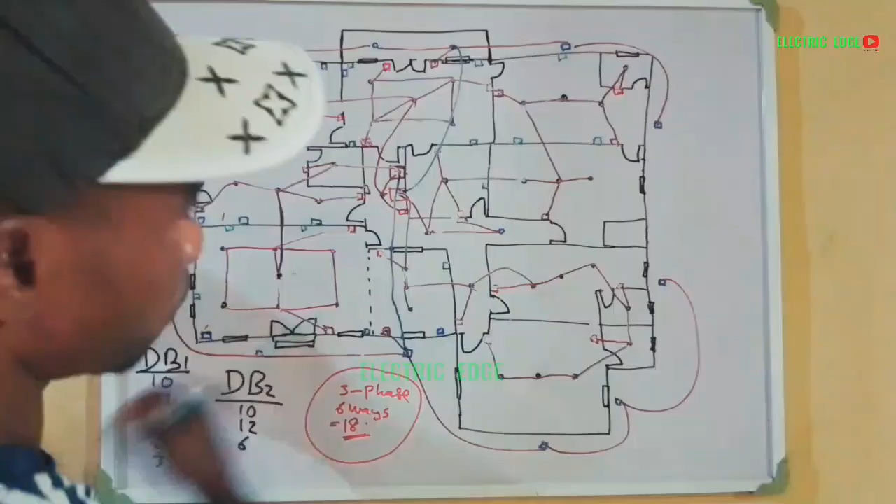Then for this other one, let's say in the rooms we'll have 1 here, another here, 2, and a 3rd one, 3 here. For this other room, let's say we have 1. For this room, we have 2. For this room, 1, 2. For this room, let's say we have 3 - our television should be somewhere here, then we'll have 3. Let's count them: 1 through 11.

We can split them into 2 circuits. So we have 2 circuits for our socket outlet for the 13 amps.

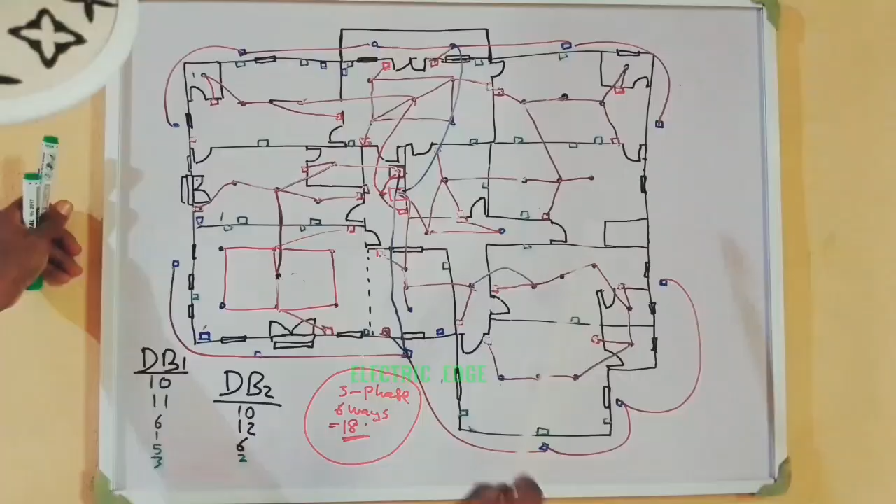Now for the AC, we have 1 AC here in this room, 1 here, 2, 1 here, 3, 1 here, 4. Our AC will have 4. Then for water heater, we'll have 1, 2, 3 water heaters. That's 3 circuits.

At the end of the day we'll be having 1 circuit - 1, 2, 3, 3 plus 2, that will be this one, this one, this one for lighting circuits. This is 2, this is 4, this is 3. Now let's start from here. This is 1 circuit, 1, 1, that's 3. 3 plus 2 is 5. 5 plus 4 is 9. 9 plus 3 should give us 12. 12 circuits. Now we have 12 here.

Over here we have 1 circuit, 2. There's another one for lighting. Then 3 here plus 1, that's 4. Plus 5, that's 9. 9 plus 3 is also 12.

12 circuits. Now if you take a closer look, you discover that for DB1 we'll have 18 openings, and we're going to make use of 12 openings. By the time we remove 12, it will remain 6. We'll have 6 spares for each of them.

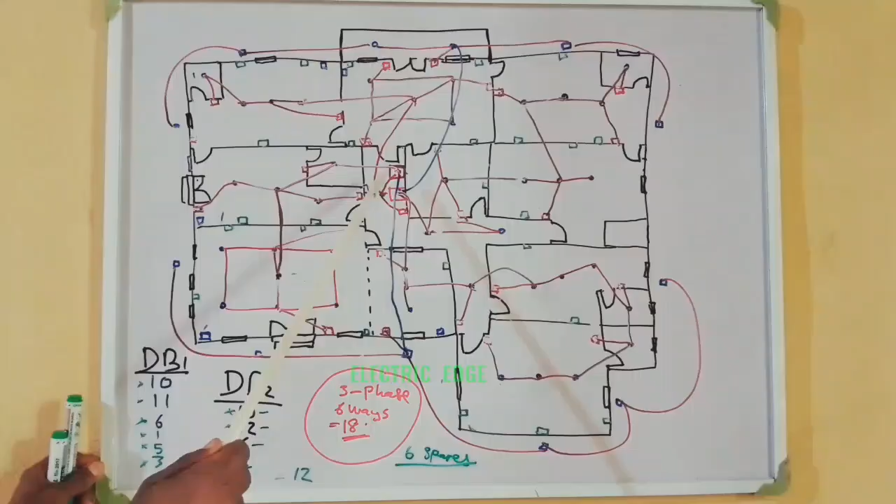I may not start drafting or running the conduit layout for the dedicated circuit. I just want to show you how to know the number of distribution boards that you actually need in a particular building. In our next demonstration, we might decide to use a 3-bedroom apartment or a 2-bedroom apartment, whichever one you want us to use.